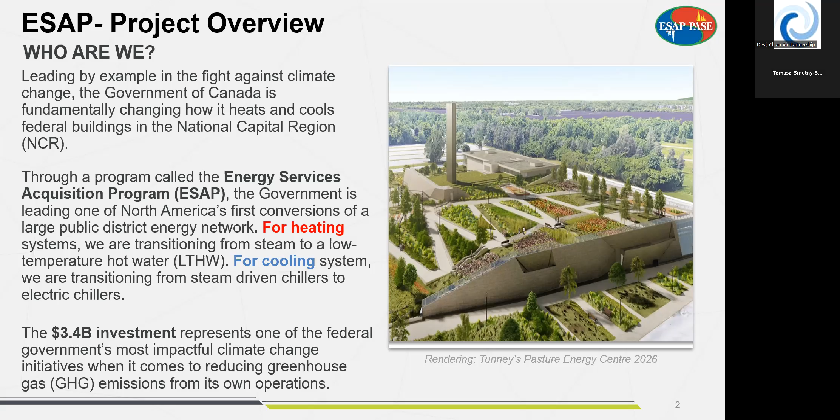Very briefly, the system size is about 100 megawatts of heating and about 70 megawatts of cooling, 80 buildings for heating, 67 for cooling, mainly in downtown core Ottawa.

There were three different campuses. Cliff was downtown core. National Printing Bureau was in Quebec. Tunney's Pasture, if you know Ottawa, is a federal government complex that is being renovated right now. And the last one was Confederation Heights, another government complex, mainly office buildings, that are right now in the process of probably being sold to the public and changed to a different environment.

There are three stages to ESAP. ESAP stage 1 is the modernization project. It has two portions. ESM is modernization of the central heating plant and distribution system, done through the P3 contract with the private partner. It's a DBFOM contract, which stands for Design, Build, Finance, Maintain, and Operate for 35 years.

The user building conversion program is a program of converting the buildings, because our system was an old-fashioned steam system, high pressure, high temperature, and we're moving into low temperature hot water. When I say low temperature hot water, it's North American low - we just want to be below 100, which is 95 degrees C. For cooling it's about 3.4 degrees C. Steam was much higher temperature, so we had to completely change the distribution, completely change all the plants, and inside the buildings we had to modernize them to be able to accept low temperature hot water rather than steam.

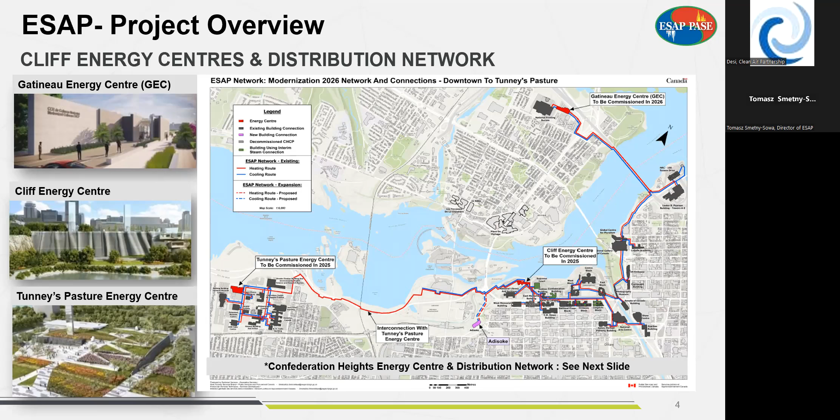We're abandoning the existing plants. This is Confederation Heights, that is farther down, closer to the airport. It's a very small loop, mainly federal building. The plan is to divest it to the private sector and build a work, live, entertain, shop community in this location.

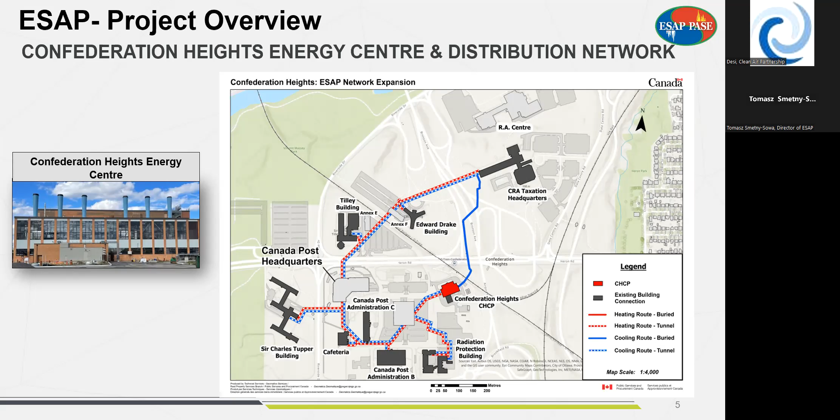This is the only plant that has been renovated in situ. We didn't build a new plant, and the reason is that most probably under the new development plan, this plant will be moved to a new location, as it is located right beside the LRT station, light rail train, which is a prime location for future development.

Target to carbon neutrality, I guess we started, our baseline, federal government baseline is 2005. So if you look at the total amount of GHG emission, the percentages are almost equal to thousands of tons. We had 106,000 tons, 106.4 to be exact, kilotons of CO2. By 2015, due to implementation of smart buildings and efficiency operation, we dropped it down by 30%.

Then we went even further down. When we go through the modernization, we'll drop an additional 33%. So we'll be at 37% left. This is 2025, where we complete the modernization.

This is without Gatineau Energy Center. Gatineau Energy Center was supposed to be natural gas. Mid through the contract, we changed it to electric boilers. This is not to be finished by 2025, so our substantial completion date for the P3 contract is October 2025. The Gatineau Center will be done in '26.

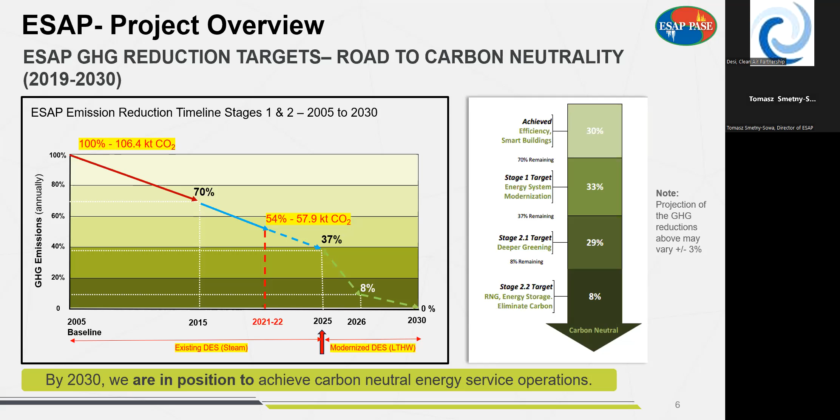Okay, deeper dive into energy modernization. 5 years of construction. Contract was signed in 2019, they took over in 2020, April 1st, through October 2025. They have to be finished. They're building a new energy center for Cliff, Tunney's, and Gatineau, and retrofitting the Confederation Heights.

The fifth plant, NRC, will be decommissioned. They're also building a new pump house. We use river water for heat rejection and non-combustion cooling.

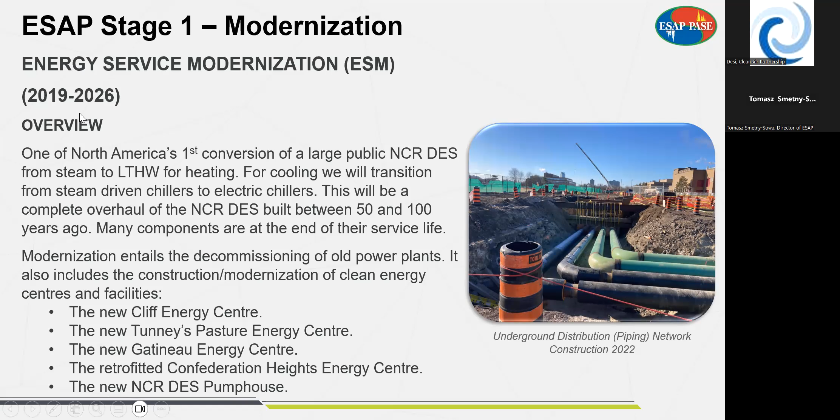The pictures are actual pictures from our construction as we're going on. On the right-hand side is Cliff, Tunney's. Cliff and Tunney's are being designed in such a way, Gatineau too, that the roof will be accessible and will be a green park on the top. People can walk on it. Right now it's barbed wire all around the plant, and you can't even come close to it.

So we are 3.5 years into the construction, and despite the pandemic and 2 labor strikes, we're still on time, on scope, and on budget. The on-time margin is getting tighter and tighter as we come closer to the end of the contract, but it's so far so good. It's a very large project. As you can imagine, we have an industrial portion because of the plants, a linear project because the distribution is direct buried, and also an architectural portion because the plant is supposed to be an architectural landscape with a visitor education center and such.

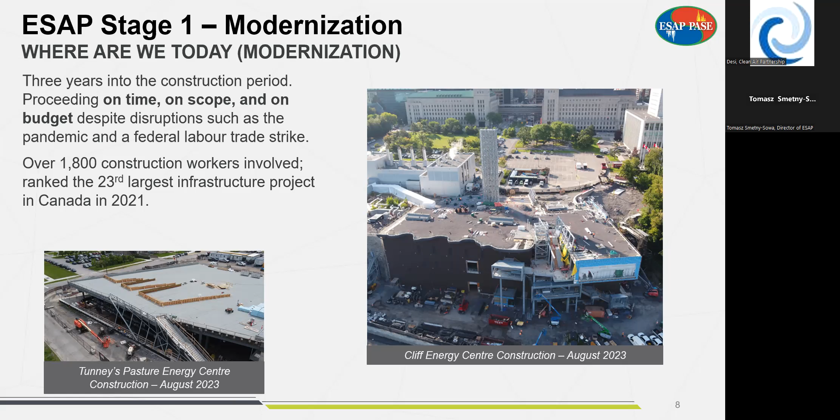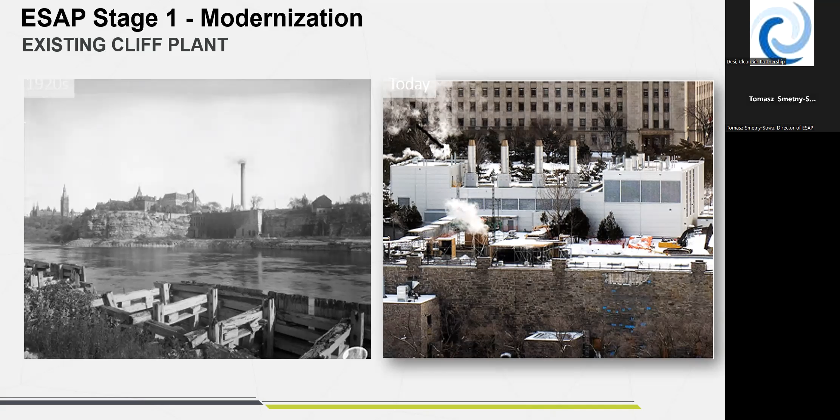Now you can see on the right-hand side, the actual plant is at the bottom. On the top is a temporary boiler plant. In 2009, we had the explosion. One of the 6 boilers exploded, but unfortunately the entire plant was contaminated with asbestos and was not accessible. We had to, and that was in October, build a temporary boiler plant, and believe it or not, from the parking lot, we had steam running in pipes in 37 days. The building didn't look like that in 37 days. Now, don't get me wrong, but we had a boiler operational and steam was running, feeding the buildings.

The screen is supposed to mimic the rock face. The NCC in Ottawa has organizations that take care of how the federal government is using the land, mainly from an architectural and aesthetic perspective. So they want us to hide the plant.

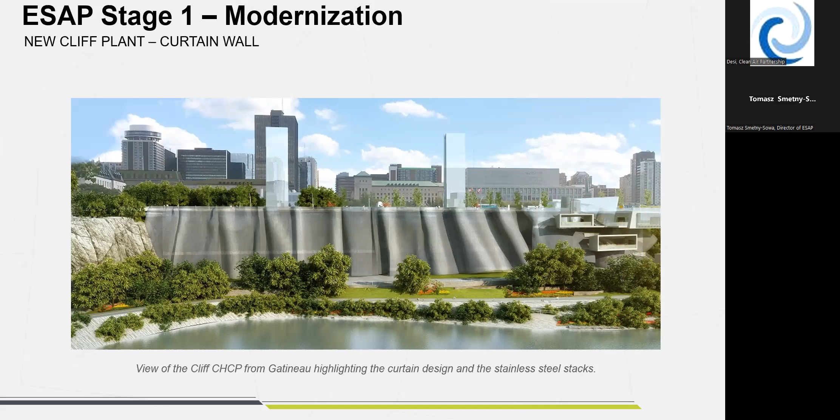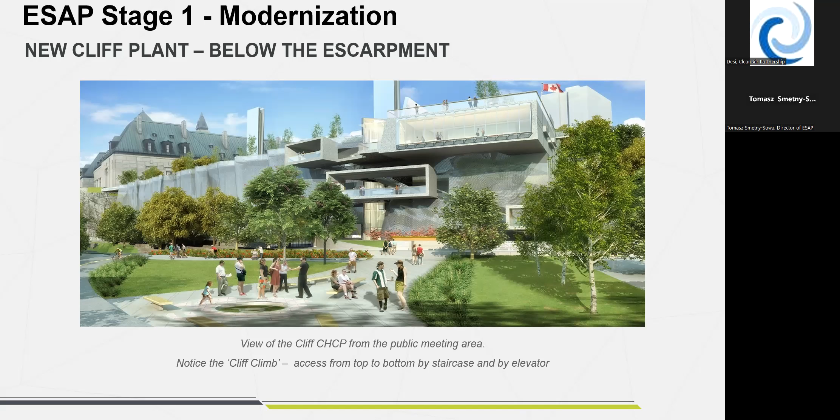As you can see, the screen hides the building completely, with the only exception of the visitor education center and the viewing panels on the right-hand side. The two silver chimney structures are clad with stainless steel. Here's another view, the building that sticks out like glass—this is the visitor education center, which will be an exhibition space with a program of work explaining to the public how we can save energy, what the federal government is doing, and the history of combating climate change. That's the top of the cliff plant, fully accessible to the public with a beautiful view of the Ottawa River and the Quebec side.

This is Tunney's Pasture, looking from south towards north, towards the river. The blue at the top is the river. Again, the same scenario—the top of the plant is a garden, a walking place for people to enjoy, with the same type of chimney. On the right-hand side you see the gray wall, and after that there's a lighter wall.

This is all glass, and the whole front of the plant is glass, so you can actually see into the generation room. You can see the chillers and you can see the boilers.

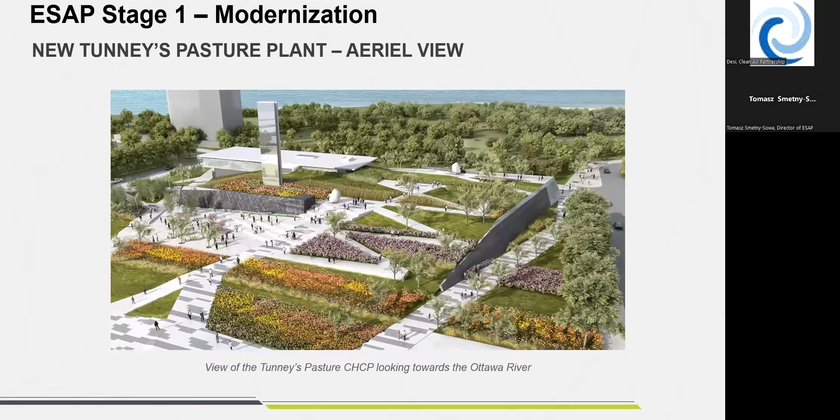The user building conversion program is a much smaller program, about 300 million dollars to convert 60 buildings—not 80, only 60, and I can explain why—to low temperature hot water. We started ahead of our private partner to make sure that the buildings will be ready when they convert the distribution system.

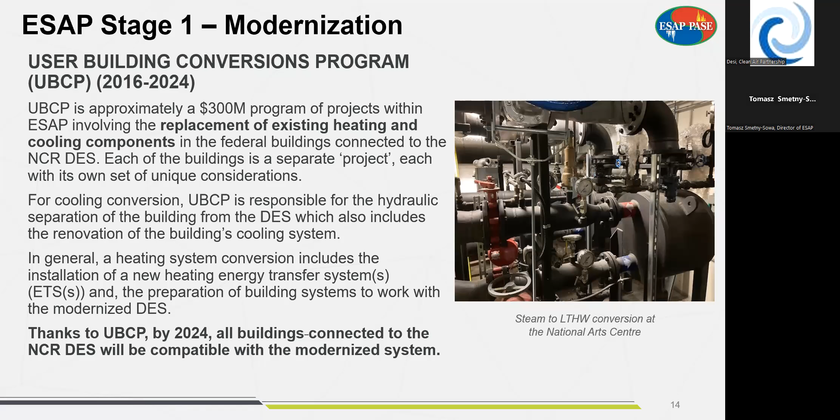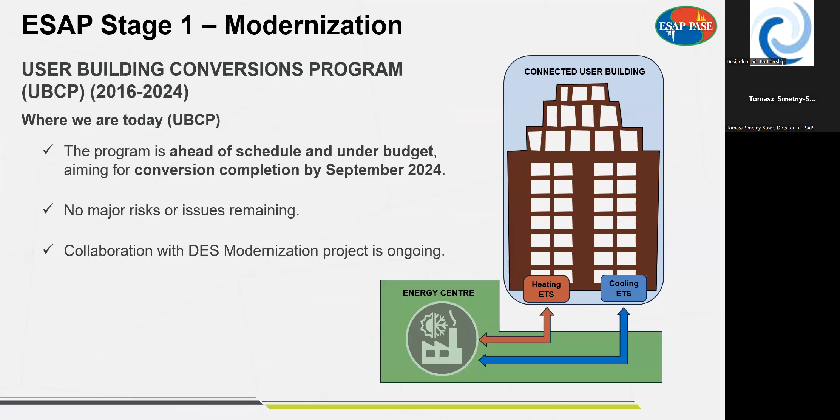That's a picture of what we're doing, showing the demarcation. The P3 contract covers the energy center, distribution, and ETS, which stands for Energy Transfer Station, heating and cooling each building. The demarcation line is the supply side of the ETSs—ESAP owns the ETSs in the building, the rest is the building's problem.

Part of our journey right now, mid-way through the program, there was a big push to become green and have more capacity to connect other clients. So in design, we already installed 20% extra capacity. It's gas-based, natural gas-based—it's not green yet, but we have extra capacity.

Our base load will be covered by electric boilers from Gatineau. Base load is about 80% of energy consumed over the year, so only during the coldest days in winter will we have to use the natural gas boilers. However, the natural gas boilers have full 100% capacity, plus 20%.

In case there's a power shutdown or outage, or Hydro-Quebec has a problem with supply and needs more capacity for residential customers, we signed a contract with Hydro-Quebec that if they were really short, we can use natural gas to help them.

100% of the cooling is provided by carbon neutral electricity. We used to have steam-driven chillers powered by natural gas, obviously, but not anymore.

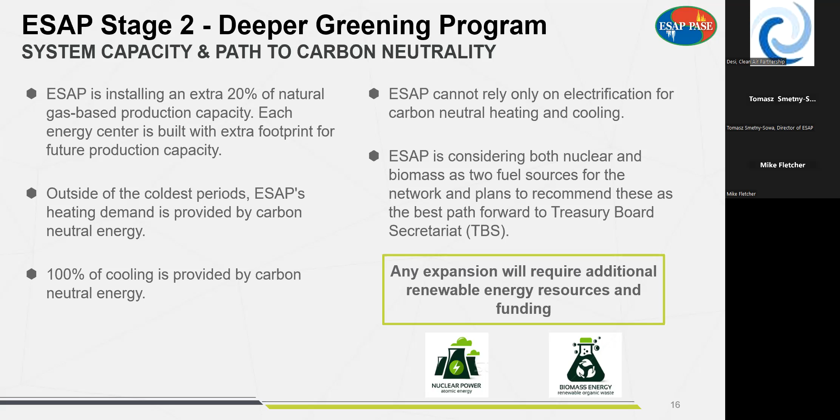Okay, so we discussed it, but here's a quick summary of what we investigated in our study. What we do is take the capital and divide it by the tons of GHG saved by the technology, and we come up with a number, and we set ourselves a limit on how far we want to go, and strategize that way. So this assessment you see here, biomass and nuclear, was recommended not based on technical difficulty of implementation, but by the cost per GHG saved.

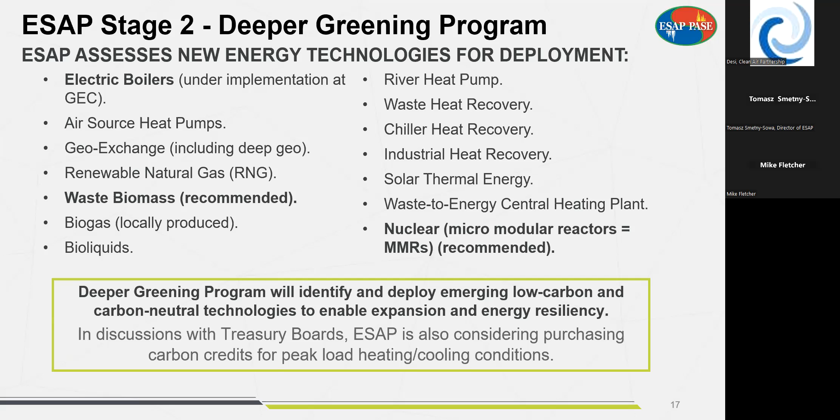So we'll see, maybe there will be some future business, but right now there's not. Our main intention is to explore the area around downtown, that's where the density is biggest, and the cost of connection is so much better, because with large density, one pipe can supply many buildings. If you go into the lower density area between Tunney's Pasture and the downtown core, it's a little more complex. However, that's the area where LeBreton Flats is a potential connection. We see the development along the LRT as a potential, so if you can follow the LRT with the pipeline, you can hook up these buildings.

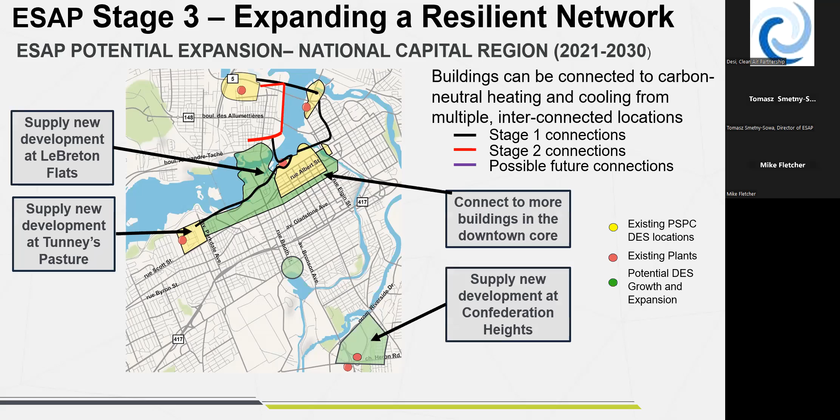That was a potential when we were planning to supply the hospital, because we would like to connect all the networks together, but right now there's no business case. We're talking to Ottawa Carleton. It's a possibility, but it's hard, the hospital decline. So I think the connection between Confederation Heights and Cliff Distribution right now is a big question mark.

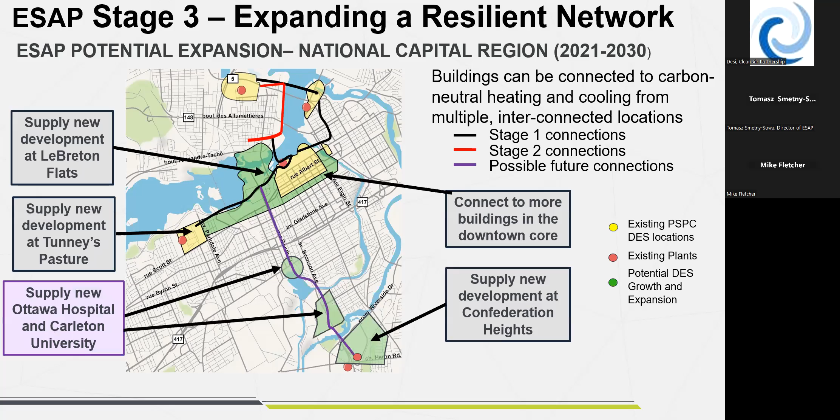But again, design of the district energy system is for the next 50 to 100 years. It's not something you design for the next 5 years. It is very heavily capital intensive in the beginning, and it's slow development. So we're planning for future where we can put the routes to connect more buildings.

The gray area that you see, or yellowish, whatever the color is, is a potential for connection. The buildings that are kind of purple are buildings that are already connected to the system. It's hard to see on this picture, but I hope you can see the difference.

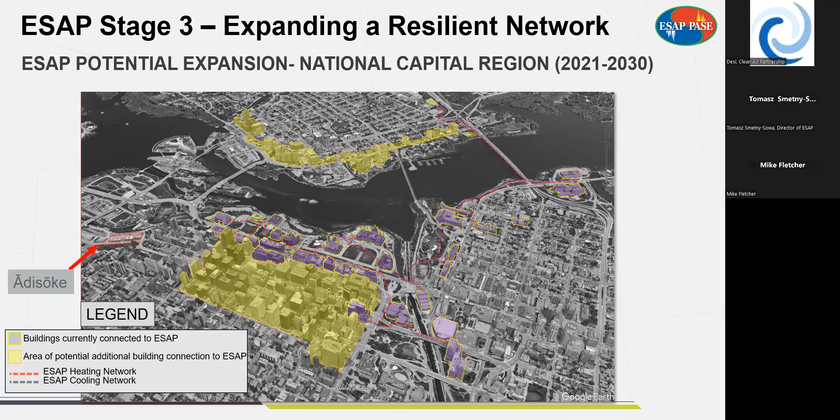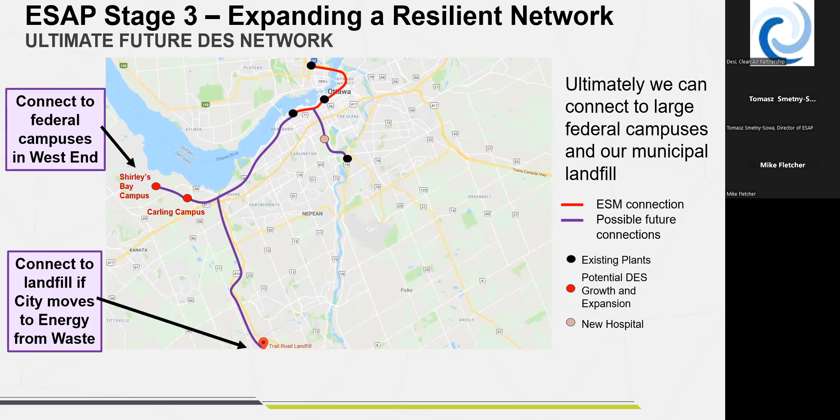And eventually, when we talk to the city, they have to do something with the garbage. We're looking at waste to energy, which is extremely popular in Europe, but I guess in Canada it's slightly different. We've got tons of room to dump the garbage, and energy is very cheap, so it's very hard to compete. Waste to energy is way more expensive. Energy from waste to energy is more expensive than natural gas, and it's comparable to electrical, but there's again a big pushback from most people.

Next step, what we want to do is get the acceptance for the next stage of greening. We presume that we will have no problem completing the project in 2026, and we have the 30 megawatts of electric boilers as a base. But if new buildings want to connect, we would like to move further.

So we're looking at the approval for nuclear and biomass. Biomass we'll know very quickly. I think within the next few months, my last presentation to Treasury Board will happen, and if they say no, we drop it from the wagon and start working on the nuclear.

DNE is an expansion in Gatineau, the little red line that was over there on the picture. We will look for the budget in the next fiscal year. If that will be accepted, we will put implementation in the next fiscal year. And expansion will be slowly expanding to other buildings. It's easy to expand to government buildings.

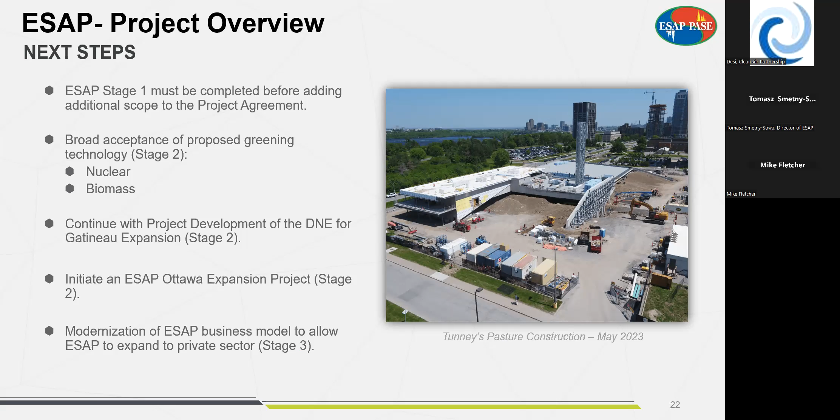Our first expansion is to Adisoke, Ottawa Central Library. That will be the first building connected to the new modernized system. We already have more than preliminary discussion, and a decision was made that the building will be connected. We're working now actively to get the project in place. We'll need temporary heating and cooling before our system is ready. So anyways, that's the first building to be connected to our system.

Now, learning: the federal government doesn't want to let go of the assets, so we keep the asset, which is, I think, okay because the assets are extremely expensive. So it's very difficult for a private partner to spend that kind of money on an asset. It's slow progress.

P3 is a good idea if you don't have too much capital. However, we shortened the P3 financing period from 35 years to 5 years. And I think for the district energy system, it's crucial. You don't want to be held hostage by the lending institution.

So in our case, the capital construction is $1.5 billion, which was borrowed from 5 international lending institutions by our P3 partner, Innovate Energy. The lending institutions have a right of veto to any change to the contract. So if you want to connect a building, they can say, no, we don't like it. So for us, a district energy system has to grow. That's the whole idea: you build a system slowly and grow it up.

For us, having somebody able to say no was important, and we experienced that the hard way when trying to connect Adisoke and convince them that connection comes after substantial completion. Because we did preliminary work before that, they saw it as a risk to the project, so they wanted us to reopen the bidding with the lending institution and change the margin. We said there's no way in hell we'll do that, because under competitive pressure you can get a good lending margin, but if there's a sole source, you don't.

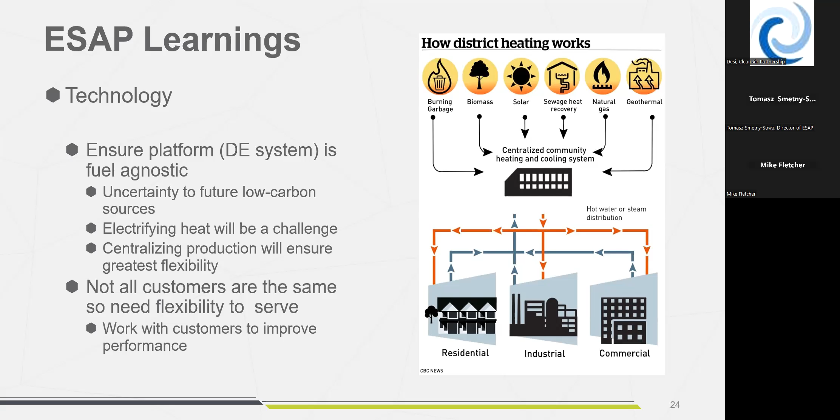Barrier to install a district energy system: upfront capital is very, very high. That's why most district energy systems in Europe and North America start with some sort of government funding, federal, municipal, or provincial, where funding is assigned and you build a critical mass of clients. Then you can move to semi-private or private operation because your capital is already protected by the number of contracts you have with the buildings. If you're starting a district energy system with only 1 or 2 clients, you've got huge capital outlay, so it's very difficult to make a business case when you don't know how many buildings will connect, maybe none, and then you're screwed.

Second is the approval process. Yes, the best approach from a capital perspective is to start with municipal, federal, or provincial government involved. The drawback is that all of them have extremely complicated approval processes, several layers, and you really have to find a champion who will pull the project through all the approvals, versus you pushing the rope up the hill, because it's very difficult.

Knowledgeable contractors, knowledgeable consultants. There are really only two companies knowledgeable about district energy systems across the world, and one has a semi-presence in North America, FVB. The other is waiting for a big contract before they develop an office here. So the Danish and Swedish companies, it's hard to get the good guys. We signed a contract with FVB, which is one of the best, and the problem was that our private partner didn't have the same designers.